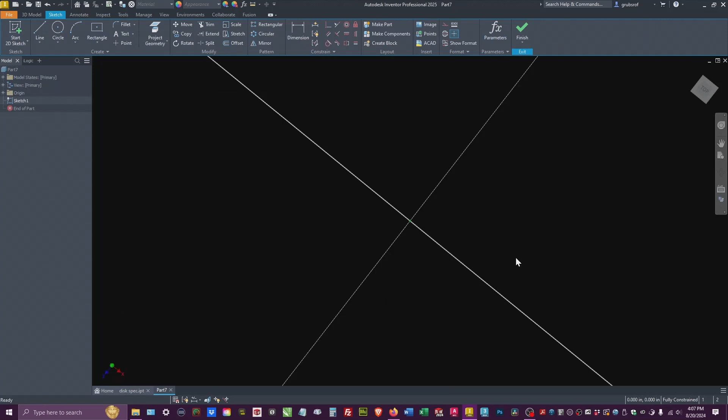Standard. And I'm going to start my sketch and I'm going to do it on this plane. I'm going to rotate this because I just like to have it in that direction. I'm not sure why Autodesk has it flipped. Doesn't matter. So 5.128, we're going to tab over, and it's going to be 3.5. Let's finish that and get out of our sketch.

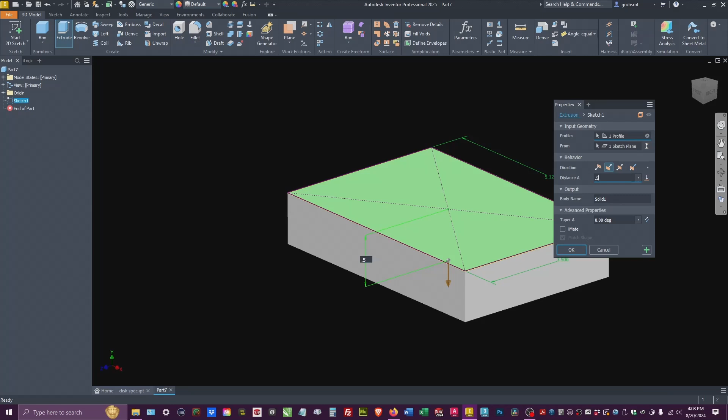I'm going to go in this negative direction for my extrusion, so let's go ahead and flip that, and I only need it 0.5. Now I'm going to go ahead and add the radius on this outside. This is going to be 7.8. 7, and say OK to that. So that's our starter point.

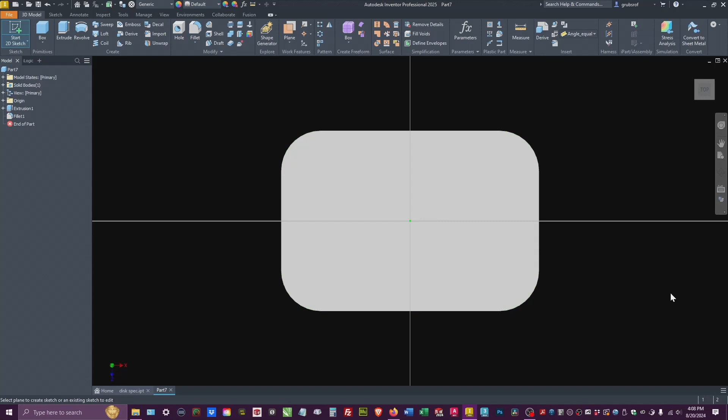All right, let's go ahead and add the internal, what we're going to subtract. And I'm just going to do that. I'm going to go ahead and put the radius in now because this is going to have a draft in it, and sometimes it can act a little wonky down the road when you start adding other radiuses. So I'm just going to do that now for this particular one. Not necessary for other models, but this particular one, I'm going to do that.

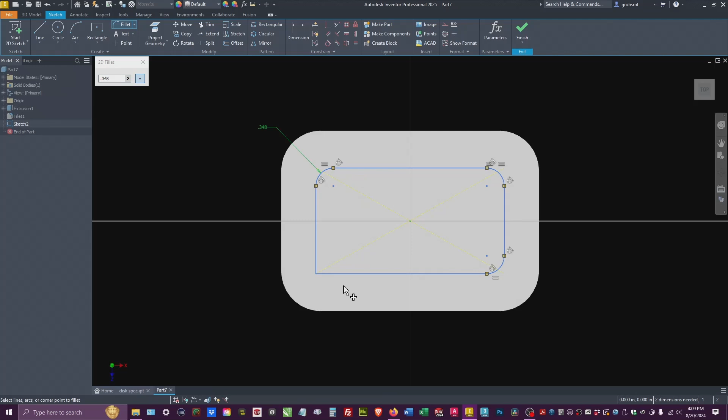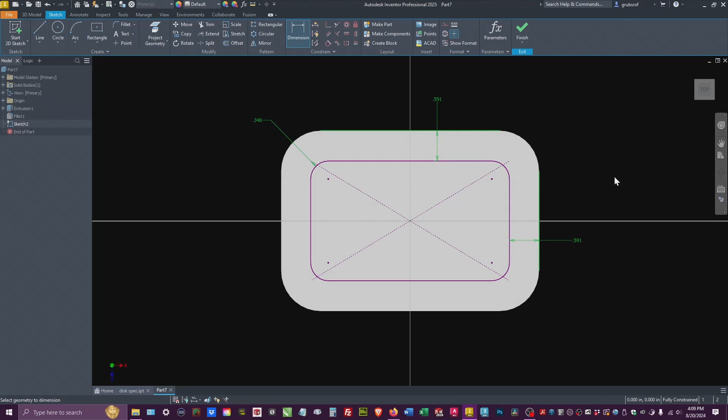So let's put a fillet on there. And this fillet is going to be 348. Sorry, I'm looking at my notes here. Okay, good. Let's go ahead and center this where I want this. And this is going to be 591. Same thing for this side as well. 0.591. All right, we have our internal. Let's go ahead and say OK to that.

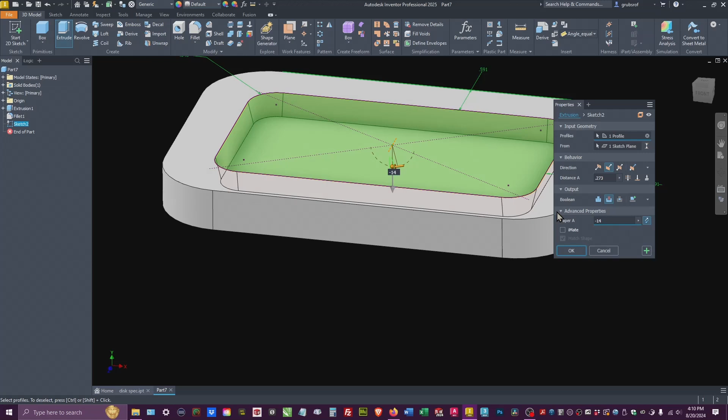So we're going to go ahead and extrude this. Actually, we're going to subtract it. This only needs to be 273 is our depth. And for our draft, it actually is going to be, let me make sure that I'm checking, yep, -14. So you can see that pull in a little bit. Let's say OK to that.

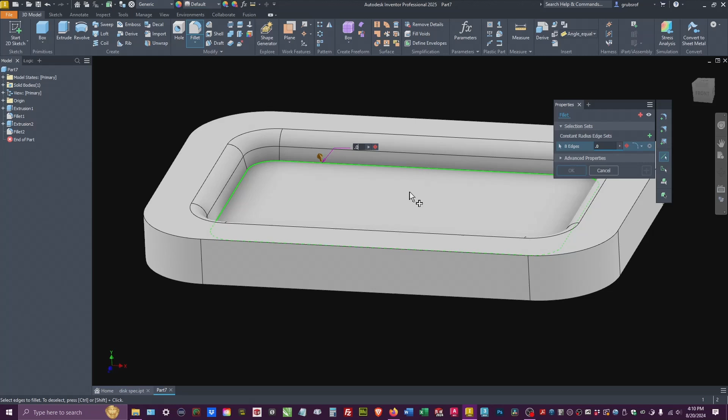Okay, we're going to go ahead and add a radius. So our fillet should be, let's make sure of that, 0.17. That looks right. I don't want to get out of the command. And the bottom one is going to be 0.08. There we go. That looks great.

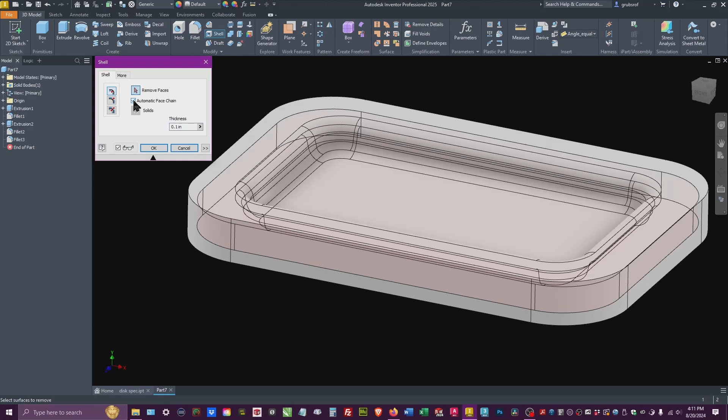Okay, this is where the little trick comes in to be able to do a subtraction of this for the depth. We have this depth, but we want to get rid of all this. So if you go to shell, a lot of times this is on automatically, but if you uncheck this, you can start picking. I'm not even holding down the shift key. Just picking the faces. And the bottom, this is what it's going to subtract, which is great.

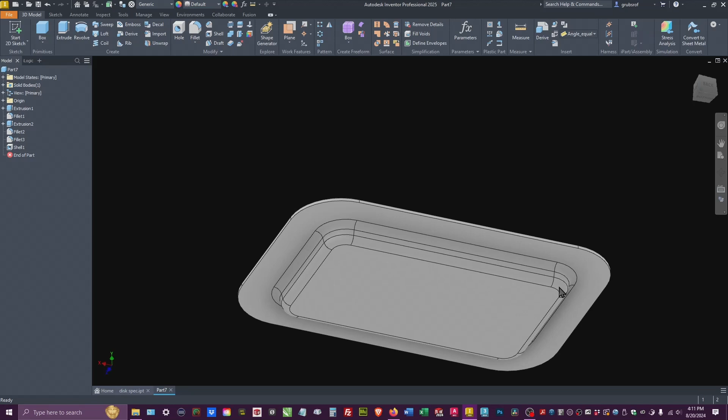So our thickness, let me check this just to make sure. It is 0.047. Should have been more prepared. That saved a ton of time and a lot of bizarre type of modeling that some people have done, I've seen. Not necessary. So let's go ahead and put our holes in.

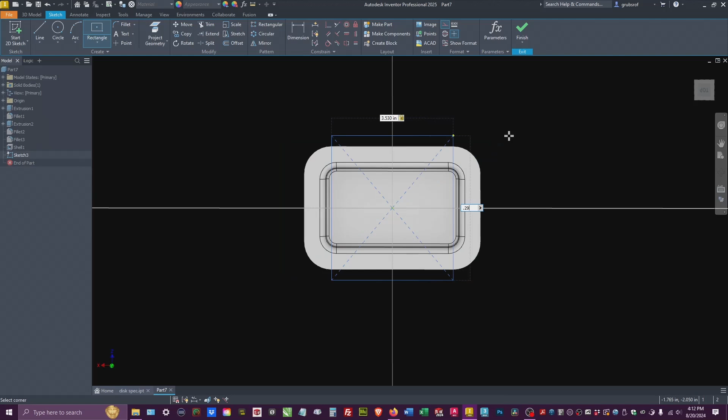So let's do the top there. We're going to pick this and we're going to do a construction line. And I usually go outside so I can see it happen. Let's go up here. Our first one is going to be 3.53. Tab over, and we're going to have 0.294. Oops, 294. Little faux pas there. 2.94. There we go. From there, let's go ahead and add some points so we can find our holes.

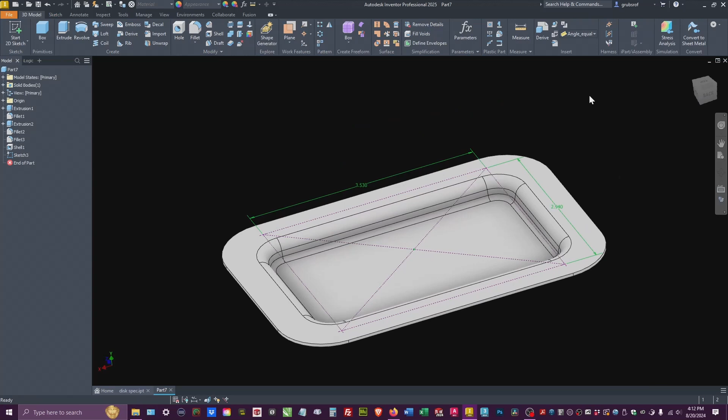There we go. Add the hole command. It's already done because I did it in the last sample, trying to figure out all the parts. Say okay, and that's it. That's all there is to it. The shell command, when you're doing the shell, if this is checked, which it normally is, you want to uncheck that, then you can select the other parts and it will save a lot of time.